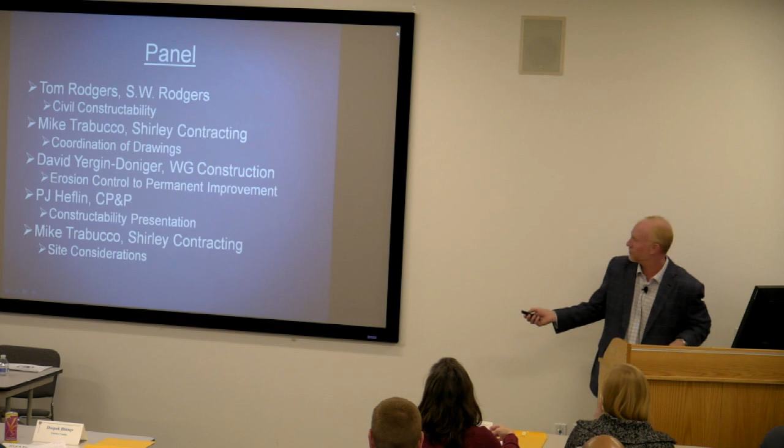So topic number one, let's see if I can navigate through this PowerPoint. To me it was pretty easy, something I see a lot, and that is the challenge of installing utilities in narrow easements.

This is more so directed towards sanitary and storm than water main, because obviously they're... whoop, how's this? Need to go back a little bit. Stay, can you get that to stay there for a second? Oh, is it timing itself? I think so.

For those following along, this is in the smaller packet on your table, the one that says SW Rodgers. Oh sorry, it's still kind of clicking through.

I know a lot of you by name, and I've spoken with some of you by phone and never met you, but I guess I can see that a lot of you have site experience, some maybe don't. Does anybody here have actual hands-on field experience working on the ground for a site development company? No? This might've just gotten a little bit easier for me then. I'm just kidding, that's fine.

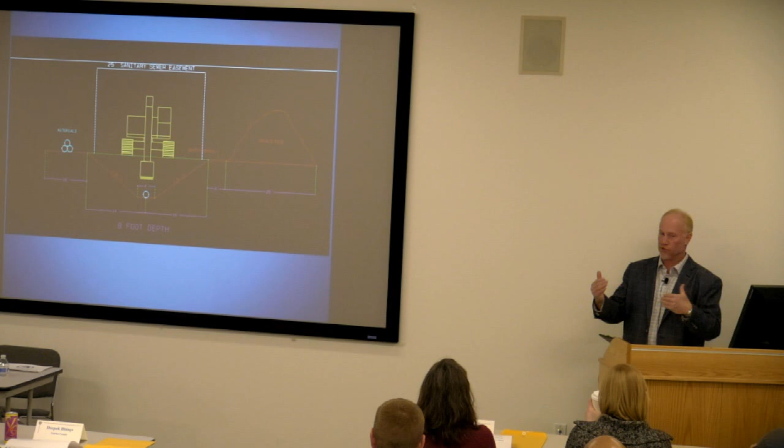Does anybody know, well you have the picture in front of you now. I wanted to give everybody an idea of how wide the footprint is of most of the excavators that we all use, about the same size commonly used in our industry, and it's a 12-foot footprint. That's regardless of whether it's a 100,000-pound machine, which is what we use to install utilities, or an 80,000-pound machine. So pretty big toys that we're playing with out here.

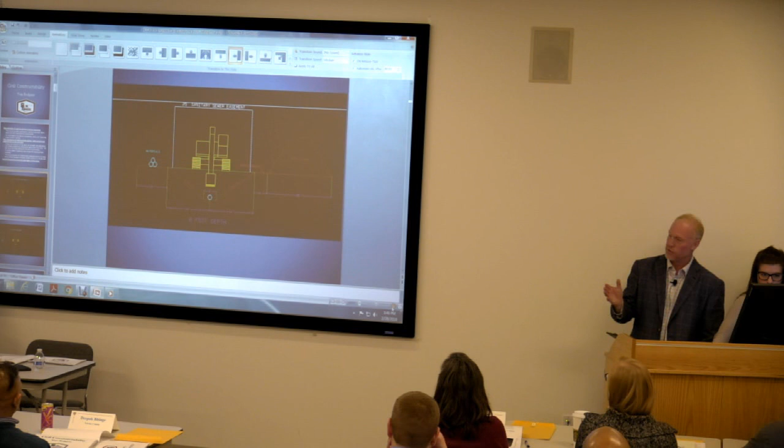How about for all the engineers, the OSHA requirements for excavation and trenching? Is everybody on terms with what they require right now? Anybody? They require a 4-foot walkway at the top of the ditch, yes, if that's what you're referring to. But OSHA regulations for trenching and shoring are actually determined by the type of soil, and predominantly what we're used to and what we have up here in Virginia are Class C soils, and that translates to a 1.5 to 1 shore slope.

So by posing these questions, I'm just trying to set the actual stage for an actual installation. You can see on the PowerPoint that I have an OSHA-approved excavation for an 8-foot deep trench.

And what I find a lot is that when I get a set of site plans, they'll be issued with a dedicated easement of say 25 foot wide. As you can see by the PowerPoint, the width of the ditch alone exceeds the 25-foot easement. That's highly problematic, because 8 foot in our line of work is really not very deep at all. Not very deep at all.

But it's OSHA mandated for a reason because it is a safety issue, and it comes down to basically a pretty easy formula. What OSHA assigns to it is 3 times the depth of your utility plus the bottom width of the ditch. So obviously, in an 8-foot deep excavation, the top of your ditch is going to be 28 foot wide.

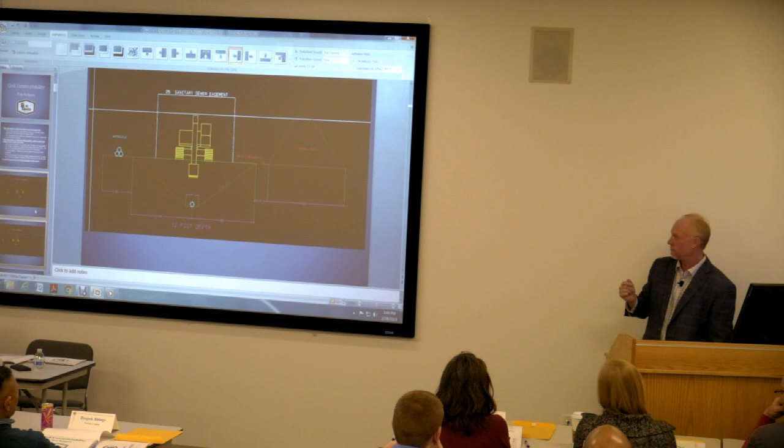The third variable is maintaining erosion controls. I need to be able to clear this easement, put my silt fence up so Mr. Glass won't issue a violation, blast it and excavate it, and keep my erosion controls up at the same time. So by the time you clear for the easement and step in a few feet to install your erosion controls, your space is limited again.

So where I'm trying to go with this is that if at all possible, check your depths, apply the formula, and grant enough room to safely install this, because one thing you cannot vary from are the slopes on these ditches, and it's a safety thing. To me, that's huge, and I'll never put my men in danger. That's for sure.

Is anybody familiar with the trench box situation? As you can see, I've applied the terminology from the trench box to the same easement, and it certainly does bring your footprint in, but by the time you have your spoils pile and material access on the other side, a 25-foot easement still just does not get you safely where you need to be. So if you can avoid it, please do.

I was actually on site just the other day, and I took a picture of a utility trench, and this is about 12 feet deep. You can see from the top of the ditch where the ladder is on the left side to the other side—it's kind of hard to put in perspective, but that's about 40 feet wide. And that's just a 12-foot deep excavation, which really isn't all that deep until you're standing there looking up at the excavator.

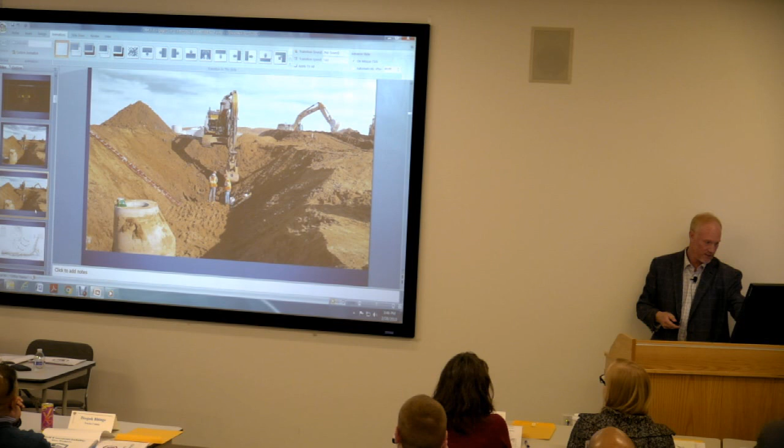It's a little bit more than that, but that's all right. It's okay. I just wanted to show the magnitude of the ditch and really what it looks like when you apply this formula to it.

In Class A soils where you have a trench situation with solid rock, you can—4 foot is the maximum. But in Virginia, because of the type of soil we have, and with most everything shot, there's no vertical whatsoever in an OSHA ditch. That used to be what everybody went by around here, but for that reason I think OSHA changed that. That's been 8 to 10 years ago now.

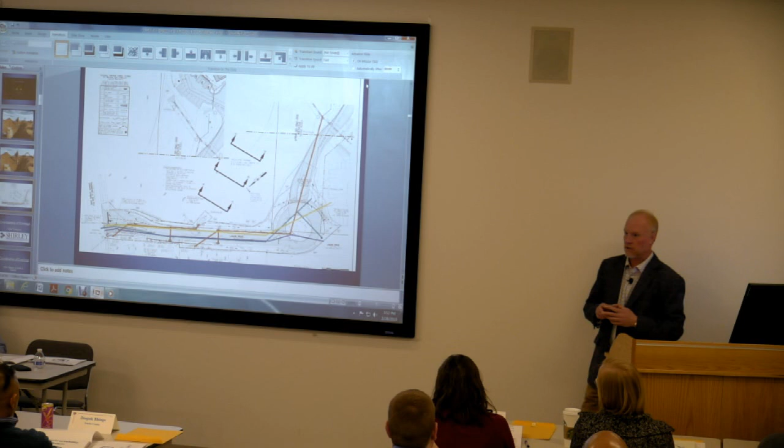Well, I think he would rely on the engineers to show this being there. He would never have known where the gas main was, even if he did know the existing building was serviced by it. You need to know exactly where it is on the plans.

So in this situation, what I did becomes a collaborative effort with the surveyors. I brought a hydro excavator out here and excavated in known locations. The surveyor came out and plotted the lines as we test-pitted them, so they could essentially build an as-built of that line, and he could plot it on the plan. We knew where we were at that point.

But even if he did know it was serviced by this gas line, unless he knows where it is on the plans, it's hard for him, or anybody, to design around it. But when they came out to mark the lines, the water meter's plain as day, right there, blue marks right to it, and from there on into the building.

This obviously got re-engineered and moved out of the way, and by the time we figured it out, my structures were already made, so it's not as simple as just moving it around. Sometimes the structures will work, sometimes they won't. In the case where it doesn't, he just bought a structure for nothing as well.

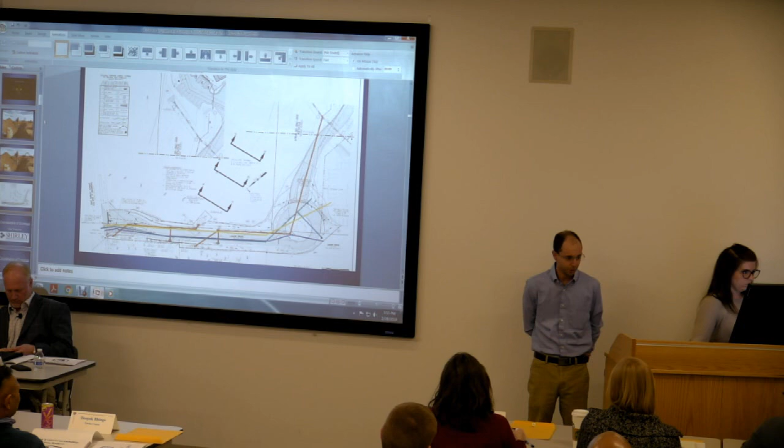Background on myself: 14 years out of college now. Went to Penn State, civil engineer by education. I grew up in the business side. My dad was a contractor, bridges, roads, infrastructure. So I grew up around it all my life.

All I ever wanted to do was design bridges and structures. I quickly found out once I got to college that I really didn't want to sit behind a CAD screen all the time, but I still wanted that fun and field experience. So I transitioned back to the more building side, but kept my focus in structures and in the engineering world.

I've been with Shirley almost 14 years now, worked there as a contract manager. So at this point, my role is really more of the bigger picture management, more than one job, keeping an eye on schedule, owner relations, designer relations, both on the design-bid-build world and the design-build world.

So we've got jobs where we'll work hand in hand with the designer to come up with the plan out the gate, and then we'll have jobs where plans are given to us, typically VDOT or Prince William, Loudoun counties, on a jurisdictional basis, and we build from those. So that's a little bit about my background.

This first section I'm going to talk about is coordination of the drawings. So we all understand you each have your discipline. You got the water resources guy, the structures guy, the bridge guy, the roadway person—everybody's got their level of expertise. The MOT person's different, the signal person's different. But at the end of the day, all those drawings got to come together and it's got to work in the field. We got to build all of this stuff.

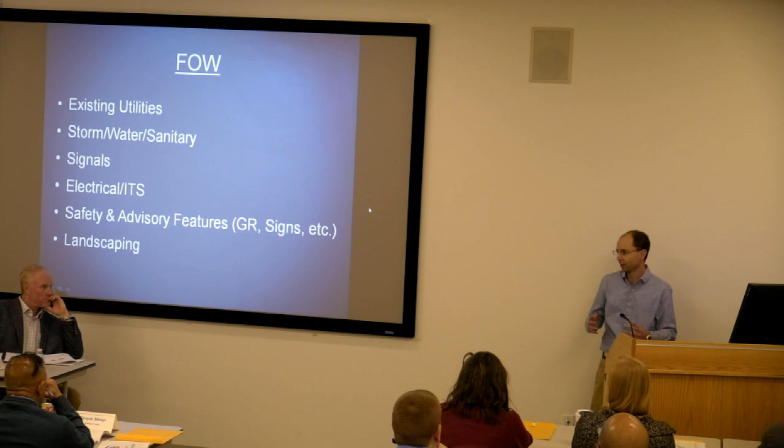So I've got just a handful of plan sheets here, and I'm going to highlight a few things—not things that were wrong, but things that as we find them in the field, maybe could have been improved on, maybe they couldn't. You guys have design constraints. The owner's given you direction on what he wants or doesn't want, where he wants things, how he expects his site to look at the end of the day. So maybe there's nothing any of us could have done differently, but if we know a little more going in, maybe we come up with a better package going out.

Just a couple things on this sheet here: you've got a new 48-inch storm running right down the road, but look how close it is to the existing 18-inch that's there. You've got a storm structure here, 48-inch there—you know this is deeper because it's outfalling. But we're going to be right up against this likely fairly shallow existing storm system with a deep trench, like Tom just showed. How does that all get pieced together?

There's no chance that the lines drawn on that page represent a 4-foot diameter pipe, which in reality is closer to 5.5 foot on the outside. You quickly end up with an 8-9 foot wide trench just to get your bedding—takes up a lot of space. And then over here, they show this itty bitty little bump out.

Back to Tom's point: how do you get a piece of equipment in there to get that end section in, get that outfall, or pick up that low spot out in the green area? You got to give us just a little bit of room to work at times.

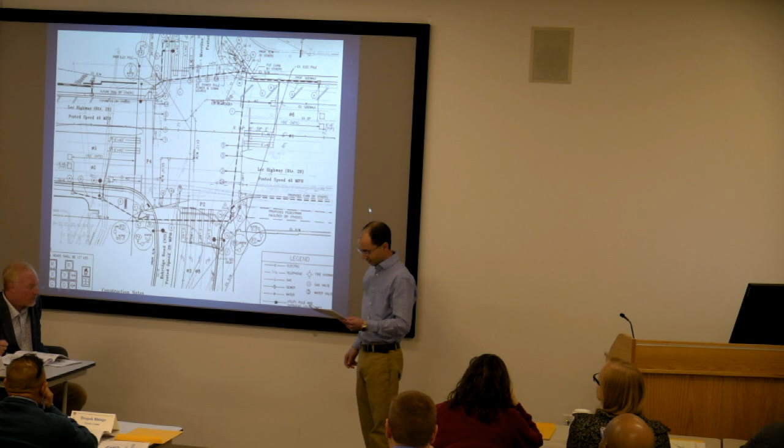So here's an intersection. All the new features are in darker black, and the existing features are in lighter gray underneath. But if you take a look, you've got junction boxes over top of existing utilities. Maybe it has to be there, but in reality it could be moved just a little bit one way or the other. It does in the field. You guys know that not everything you show on the plans ends up exactly where you thought it was going to be. Sometimes we have to move things around, and it just works.

Conduit next to a sanitary lid. There's a few of these spots throughout here. And a sanitary line there. You've got this signal pole right here. Every set of plans, doesn't matter who designs them, signal poles are just a circle in the ground. Depending on that mast arm, that circle could represent a 4-foot shaft that's 20, 25 foot deep.

It's a contractor-designed element, so it's not something you're responsible to design the foundation for. But you got to understand what that foundation is going to be, how big it's going to be, how deep it's going to be. And with some of the rock we've got in the area, you're not drilling 20, 25 foot deep to put a foundation in cost effectively. So you end up with a spread footer, maybe 10, 15 foot square, with a pedestal on top. They're still 8 foot in the ground.

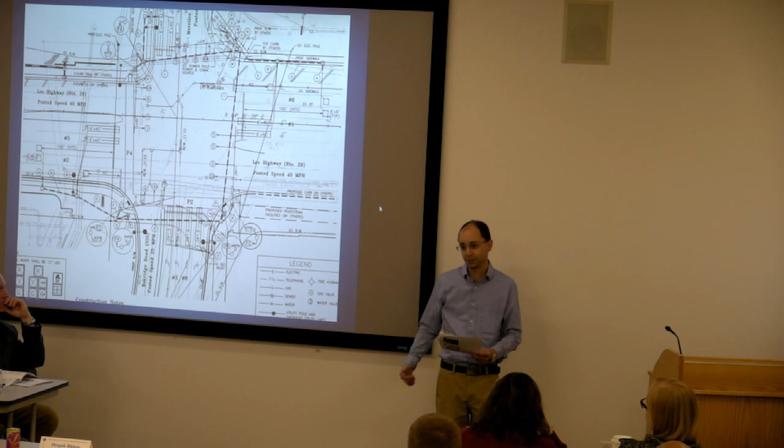But now you're hammering a big hole in the ground to get that one piece in there. And if we stick them too close or right up against sanitary structures or other facilities, water facilities, then we miss the mark, because now that owner can't service his facility at the end of the day. He can't get in there and maintain it if something goes wrong. Or he's mad when we go out there to build it and says, you're not building that on my easement. So we got to understand all those features and how they interact.

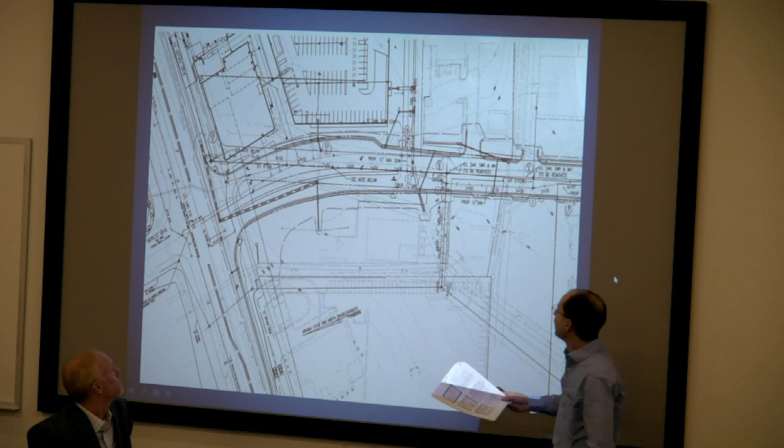So this is just another sheet, a little bit different view of the first sheet I had. Well, look how many times the storm system crosses the road. There was a lot of opportunity to optimize. If we looked at it from a more holistic approach, sure, it probably made sense. I'm sure the designer had good intentions on why he or she put this thing together the way they did. But if you step back and looked at it afterwards and ask, is there a better way? Could I upsize a couple pipes but take a bunch of footage out of the job?

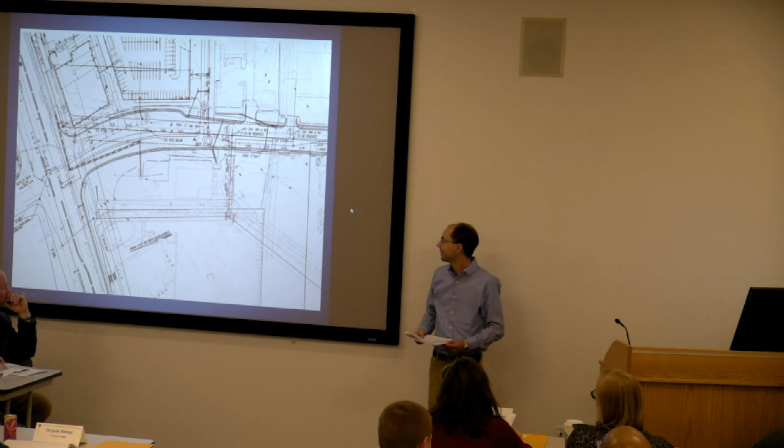Sure. At the same time, this has got an active, smaller road that runs through the whole thing, so I'm actually crossing the road to put a lot of these runs in. And then I'm crossing a number of utilities that run down that existing road to put those facilities in. The less time we cross traffic, the less times we cross utilities, the more efficient our operations get, the better the product is at the end of the day, the less cut up it becomes, the better for everybody.

And then something we deal with a lot on the Shirley side, being more of the heavy civil horizontal world, is phased construction. None of us like to sit in traffic, but we certainly don't like when they take a lane away from us for a long period of time when we go home. So that doesn't happen around here like it does in a lot of other states, a lot of other jurisdictions. So what happens? We're phasing the work so that we can keep moving people back and forth while we try to improve the situation out there.

So you got to consider how we're going to maintain that traffic, how we're going to construct it, but also the duration we're going to be out there. And then provide the necessary information so that when the contractor's bidding it, we can evaluate what's going on, how it's really going to be, what we should expect.

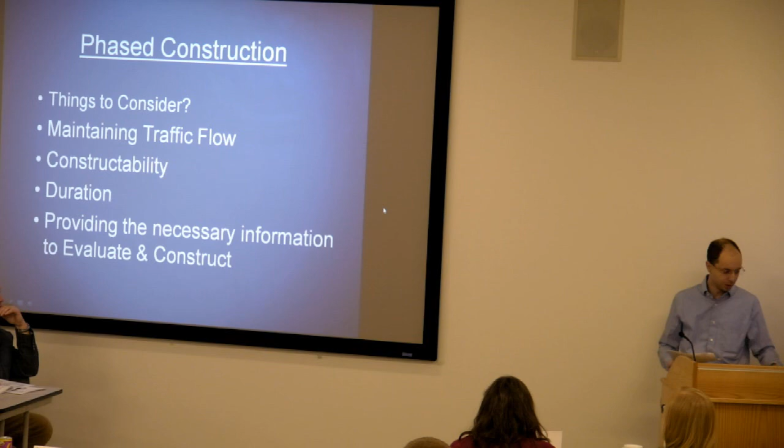So this here is an intersection out at Linton Hall and 29 - anybody familiar with the Gainesville area, the massive improvement just off the top of the sheet, there at the railroad.

The designer designed a detour to take traffic off the alignment. It improved the situation at the same time, gave some more lanes, worked pretty good. But the designer missed it, and we missed it too when we pulled it together. We built the detour exactly the way they showed us, and didn't catch it until we built this road all the way down to this intersection.

There's a 4-foot vertical delta between the new road and where the old proposed road was. It's what they needed to have, you needed the new profile, but could we have done something a little different on the front end? Sure. Maybe we could have adjusted that detour alignment, caught a little bit of buildup as we came through in that phase.

That would have saved us from doing all 4 foot of buildup in the back phase later on. As a result, we also had substandard signal height for about 2 months. So if we would have done some things at the detour phase when we set it up, adjusting that profile up or moving some things around, maybe raising those signal arms or signal heads that fed the intersection, we wouldn't have had that 4-foot vertical jump at that time.

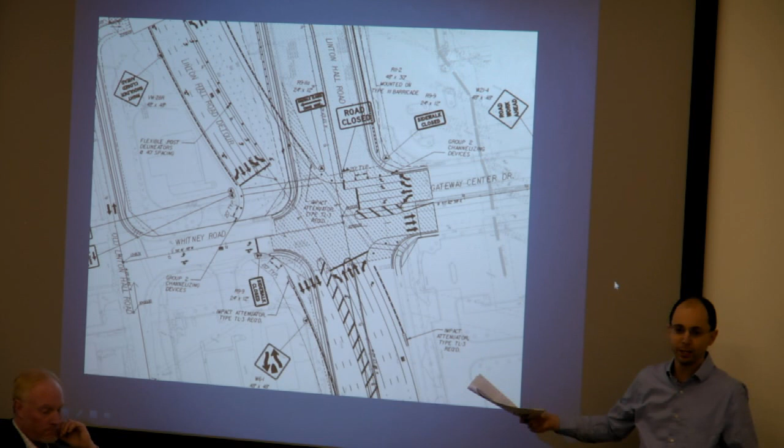It might have been 2, 3 foot, something a little bit more palatable for the owner. At the same time, it's 4 foot of asphalt. There's a lot of asphalt and a lot of expense that the owner chewed up in that intersection for no good reason, but he had to, just to maintain traffic moving.

Some of the cooperation we're expected to have at the end of the day. As a prime on most jobs, we take the lead, but our owners never exclusively give us a work area. I've had one job where I had one contract, and another general contractor was fortunate enough to get a job directly above me. He got the interchange, I had the widening underneath. We had to work together with overlapping schedules, overlapping scopes. I'd have a sliver widening going up, they'd have a sliver widening coming back.

It's unique, you don't see it too much, but if we don't have good collaboration from the design, the engineering, the owner side of things, and the contractor working together, all that blows up in everybody's face. So you guys got to understand what kind of collaboration you're going to have. Then you got the subs and the adjacent projects and other ancillary features that all play into how our sites work, how our jobs come together. Because at the end of the day, we can't impact everybody.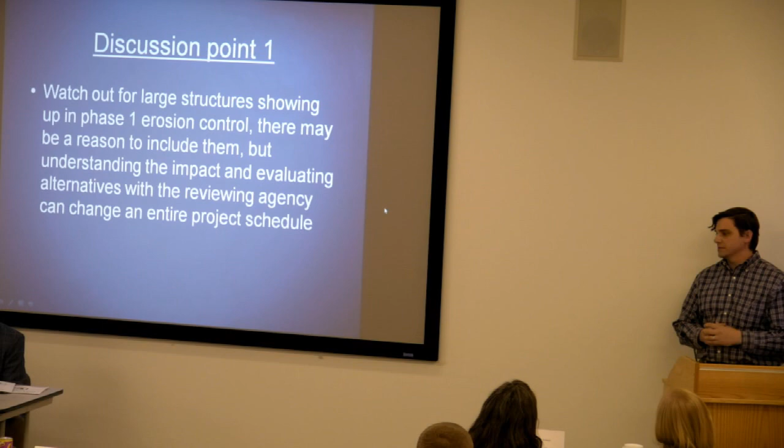Here it is showing up in phase 1 erosion control. And I'm sure if we went around the room, I could hear dozens of examples of why this shows up on this plan, and we have to deal with it.

But here's the story behind this structure. This was a residential project. Developer wants to close lots. That's what it's all about. Closing lots, getting people in the houses. That's when the payday starts for all the investors.

They try to minimize their costs, the developer, all the way right up until the last minute, right? And then all of a sudden, whoever the winning site work contractor is gets a phone call, or maybe it's a series of meetings of negotiation, whatever it is. Go.

Developer says, give me the approved set of plans, because we don't have that one yet. That's something that happens to us a lot. We have the bid set, and then things change, and then we get the approved set. Okay, so now we're ready to go. We've got the approved set of plans, roll them out on the table.

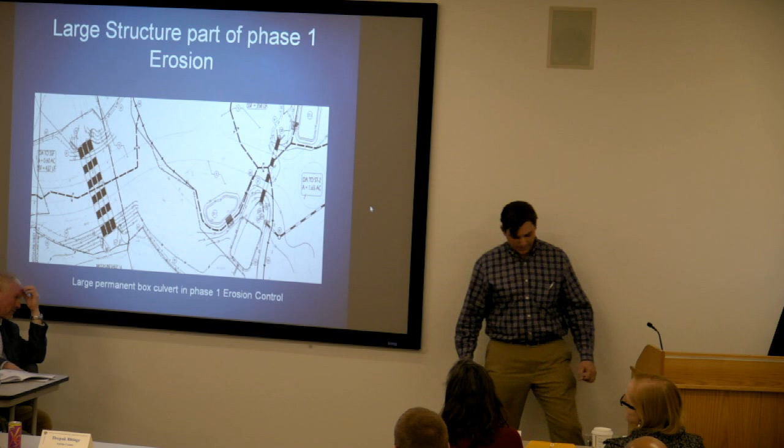And that becomes an issue in the field. Tom and Mike, I see nodding heads. If you've got anything else to add on the end of that. Well, I do, and I almost went with this topic as well, because whether it's of this magnitude, or say it's just a 60-inch class 4 RCP because it's a permanent structure.

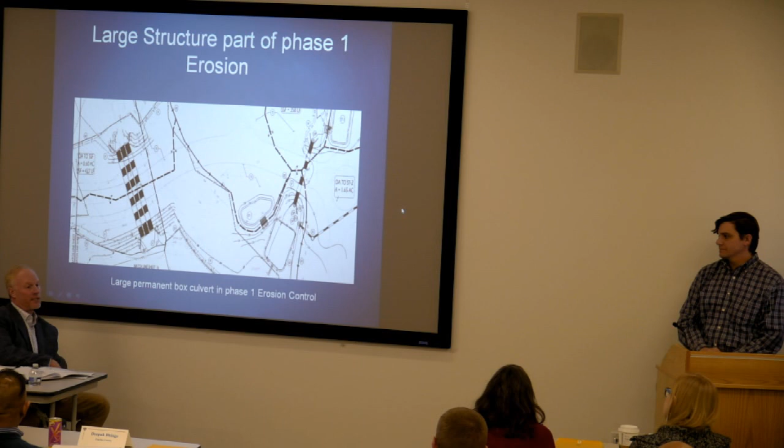What I see a lot of is, that's fine with the erosion control showing this pipe going through here, but on the final site plan, your sanitary goes underneath it. It's not very often shown in a phase 1 erosion plan, but you're never going to build any kind of permanent structure, turn around and take it back out, put your sanitary in, and then— I mean, you're not going to tunnel it.

So the deeper utilities need to go in first, and that needs to be taken into consideration when any permanent structures or pipe are included in the phase 1 erosion plan. Greg's not going to want to see too much activity, too much disturbance in phase 1, but you're not going to put it in, take it back out, put sanitary in, put it in again. So looking ahead at what utilities are involved with putting those erosion controls in is, in my opinion, huge. See it a lot.

Good question there. The one thing I would add to that too is you're designing this large structure for an ultimate condition, whether that's a 50, 100, or 200-year storm, whatever the storm is that you're designing this big structure for. Phase 1 E&S, you might be able to get away with a 2-year storm, a 5-year storm. So this big box culvert or multi-barrel system—maybe it's 1 barrel—gets me across, gets me through my site. I can now do what I need to. I don't risk damage, I don't risk silt to that permanent structure, and it gets you an option.

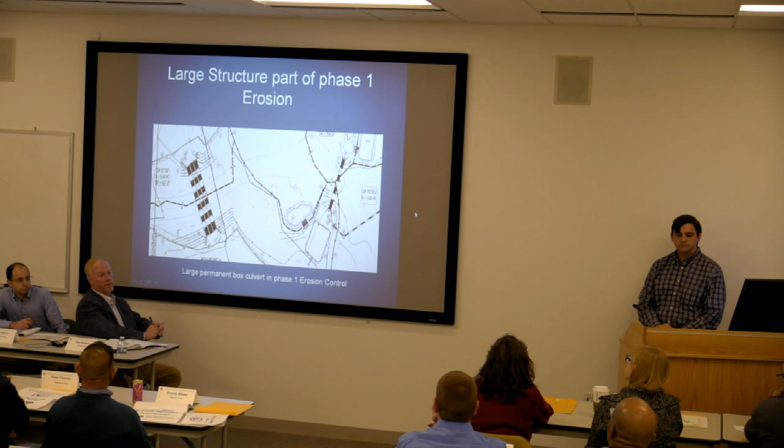2, 3, 4 36-inch corrugated metal crossings. I'd rather see the CMP in there. Yeah, you know, it really makes no difference, I can go either way. I just need to see the sanitary in if you're going to show the permanent. That's where I am with it. To me, it really makes no difference.

I'm always going to try to do what's right for the owner and what helps him out the most. Sometimes you cannot avoid it. Sometimes you're subject to wetlands impacts, in which it's a time-sensitive issue.

My thing is, I can put temporary pipe in. It's not a problem. You can beat it up, get the timber out. That kind of stuff takes a beating when you're still in the clearing process. So that's not as much an issue as just showing all the proposed utilities and how the phase 1 plan affects the ultimate plan.

Keep in mind, at the end of the day, most jobs, whether private or not, we have to TV a lot of these facilities now. That's pretty much the requirement across the board. So not only are we TVing for silt and obvious blockages, but now we're measuring cracks down to the millimeter, joints down to less than an inch. So these structures that we put in early have a much higher susceptibility to damage just from the 100,000-pound machine, the soft soils above them, maybe minimal cover. You needed a big structure, but you got 2 feet of cover over top of it to your finished pavement section. So you need to consider all of those facets and see how we can minimize things. If it's something you can put in the plans as an option, build the permanent, or here's a temporary if you got to use temporary, and then the contractor can make that decision.

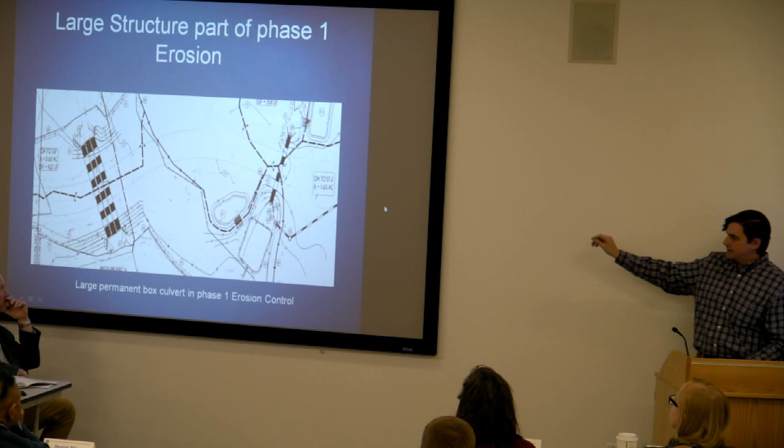I want to jump on that one comment Mike made, that's really important from a structure standpoint. I'm trying to be material agnostic on this discussion, but a structure is designed for a certain amount of dead load, a certain amount of live load. If you're scratching this culvert in and putting back basically to existing grade because you haven't done any fills on the rest of the site, but this ultimate condition is a 20 fill, for example, you're running 100,000-pound excavators, 30-ton rock trucks over the top of the structure without having the right amount of dead load to displace the live load of the ultimate configuration. You're really putting the structure at risk.

You don't have the same issues with pipe, but pipe has a bigger range. You need to have 3 feet of cover over top of the pipe during construction. It happens, a lot of cracking in concrete pipe happens from the rock trucks, dozers, without that 3-foot condition.

Good question, and definitely worthwhile. If there's a way to put it as an option and let the contractors figure it out or take risk on bid day, then that's up to the contractors. It gives the inspectors the leeway to say, oh, there's an option here, we don't have to hold up phase one.

There's also quite a bit of work, and this is the last comment on this slide - it's going on a little more than I anticipated. But there's a lot of work to get this in. There's a lot of excavation, topsoil, haul road that needs to be brought back there. And it could be pipe, same thing, tractor trailer pipe, and you've got track equipment hauling the pipe back there. The end walls would also have to be moved back there in some fashion as well. So in the spirit of phase one, where you're trying to minimize your footprint on the site, this really doesn't help with that.

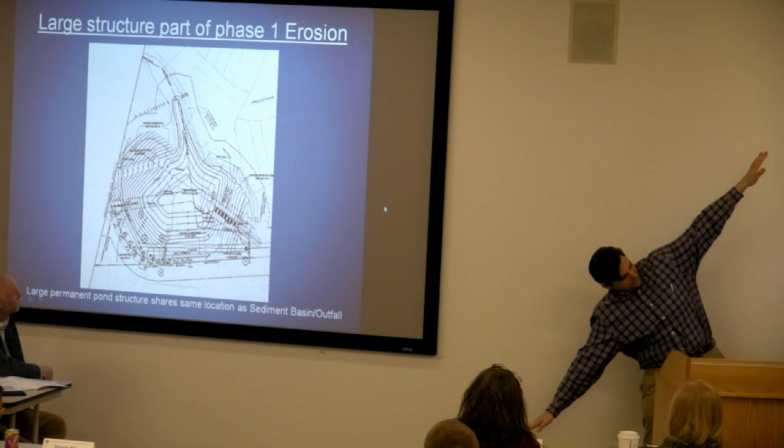So this is an interesting structure, and I don't know if there was a better way. We found a better way in the field, but it was tough. This site was like this, and you can see it in the grades.

So we're looking at this thing right here, and you can see these grades, 2-foot contours. Start counting those up to the top of dam elevation, I think you'll end up with around 20 feet. My memory is this structure was 24 because we had to put this base all the way down on existing grade, actually cut topsoil and go down a little bit deeper and build it back up.

You can count the contours going back down. At the top of the structure, the grades ended up tying into the size of the structure. So there's a pretty big capacity in the pond, and this was catching water for the entire site.

I didn't show the erosion control plan on this one. The temporary basin on this particular drawing is right here. Nearly impossible to build in the spirit of construction.

So now you've got back to the point that Darren was making, let's put the permanent one in on day one. This structure was 24 feet tall, 14-foot diameter, round. And if you look at this little piece of pipe that comes off the side here, it was shown as RCP. It ended up being ductile.

This happens also a lot on plans. For some reason, we see 12-inch RCP specified for these dewatering devices. Inside the structure, what you don't see is there's a sluice gate. So that's not sitting on a shelf in most cases.

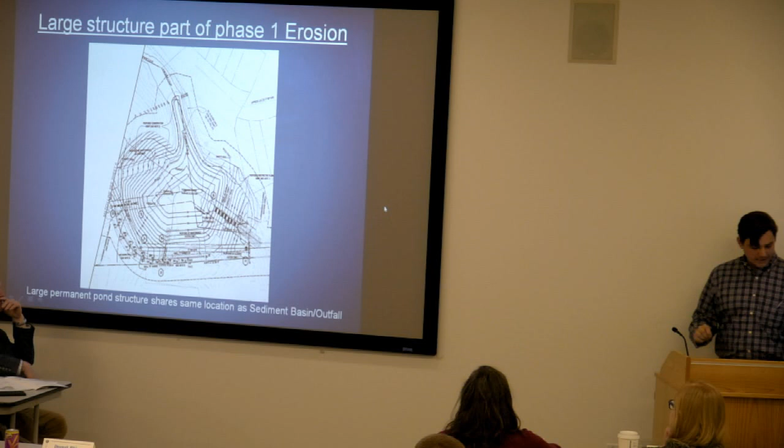Discussion point 2: watch out for the location of sediment basins and traps in phase 1 erosion control. We've been talking about that, and I think these next couple slides will go pretty quickly. Here's one where I put side by side phase 1 erosion control and the permanent structure.

Pretty benign, but if you actually get into what it would take to build this thing, this is a really tiny weir wall. It's really not that big of a deal from my perspective. But you've got your permanent pipe right here, and your temporary pipe right there. It's challenging phasing when you're going to switch.

Now in this case, we had a phase 1 erosion control plan that showed temporary pipe, but it's that transition - when can you transition from phase 1 to phase 2? This project, why was this difficult? This is going, I think, back to Darren's point - after the houses were built.

So people were living in these houses, and we're trying to get back there to put in this weir wall. Not a big deal, but there are kids playing, there are people who don't want their nice sodded yards torn up. But we couldn't, because of the way the construction was so aggressive to get those houses closed and sold, this was a big deal.

And now we've got a pond that is holding water. It's been holding water throughout construction that needs to be dealt with in order just to get that little tiny baby weir wall in there. This would be a great circumstance where the phase 1 gives you that option, or there's maybe a phase 1A where you could transition from temporary to permanent.

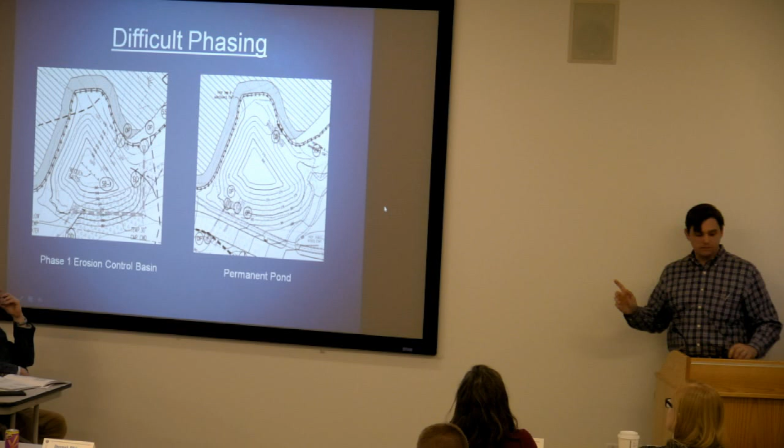Any questions on that? What do I have here? This one's challenging phasing. So this was a monstrous retaining wall - there's no better way to do it, to be honest with you. There's no better way to do it. But just look at it.

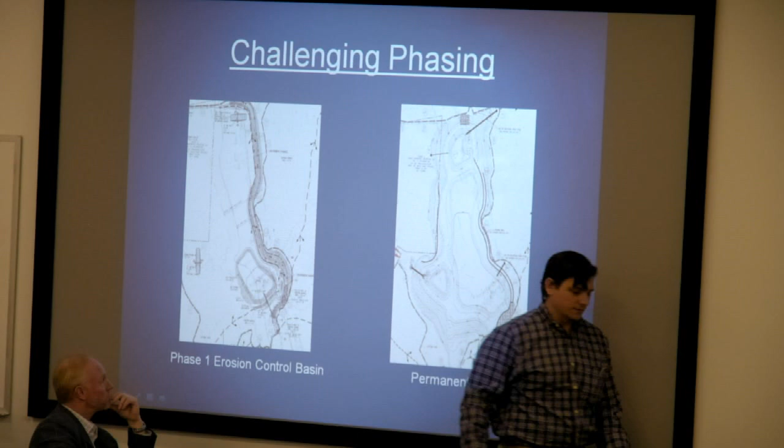Here's your pipe, here's your basin. You look over my left shoulder, this is the permanent pond over here. We're outfalling through the weir wall of the permanent structure. There's no better way to do it. There's a tremendous grade change. These ponds - I don't remember how many acres this was, 3 or 4 acre pond - hold a massive amount of water. Just tough. That's the only reason I put it on there.

It's a challenge. I couldn't tell you, and I couldn't proclaim to give you a better way to do it. But the whole time that you're building that weir wall, you're coffer dammed off, trying to hold back the water, pumping water, trying to get the riprap in, ultimately closing up the hole. Difficult. But I couldn't tell you a better way to do it.

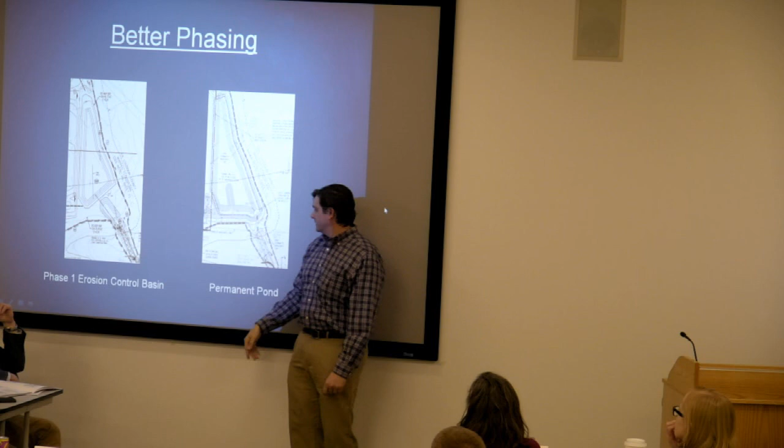Better phasing - so this one's better because it could be done. And here, really quickly, temporary pipe on the right side, coming out here, tying into the ultimate spillway, and then tucked in the corner over here is a structure. Fantastic. When this pond was built, ultimately what we ended up doing - it wasn't my company, but the company we were working for - built the coffer dam here and just isolated that area.

So we could come in after this was done, when the timing was right, build this structure, run this little piece of pipe, and when you could transition from phase 1 to phase 2, yank the coffer dam, desilt the pond, put in that little grading piece, and everybody's happy. So that's ideal, but you don't always have this kind of real estate to deal with, I get that. But this is a much better in-the-field transition.

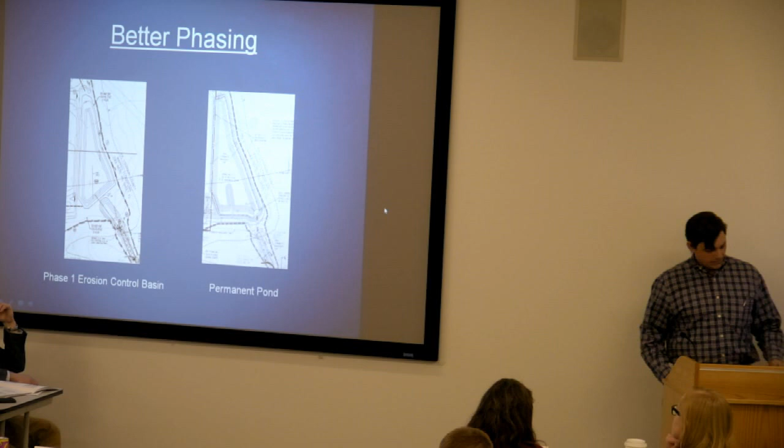Any questions on those 2 items? All right, so this is just a quick summary, really restating the other 2 slides. So if you're reading it and you have deja vu, it's because it's exactly the same words that were on the other 2 slides. And that's the end of my piece.

So I'm honored to be able to participate in this panel. And if you guys have any questions about anything we discussed, happy to address those now.

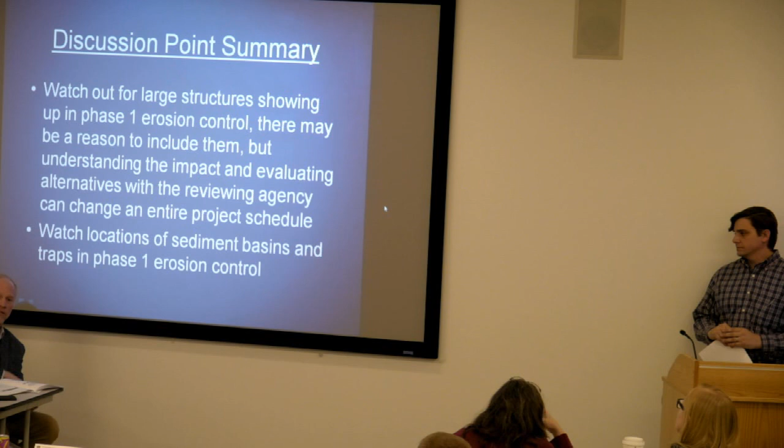It's very rare that I'll install a sediment basin exactly to plan. We're always conscientious about meeting the capacity, but if it shows it's definitely going to be a temporary pipe and structure outfall, I always relocate it or move it far enough away that I can ultimately - whether it's a cast-in-place structure or precast - still have the temporary pipe functioning, far enough away where I can safely put it in, because you need it to function as well, and you need to be able to structurally put the permanent stuff in. If not, I'll have a discussion with the inspector. As long as I meet capacity and the grades are functioning, we vary from it a lot to make that transition easier. Happens a lot.

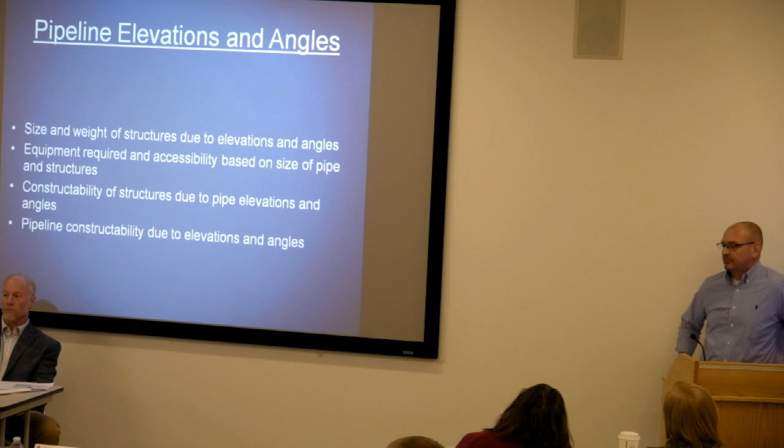Will there be some savings in mobilization of HDPE versus concrete? I don't think pricing considers mobilization of materials to the site much. It's easier to handle - the price per foot is included in my price per foot that I buy it for, and it's definitely easier to get 500 feet of plastic pipe delivered than concrete.

But all things considered, going along with the slide I showed earlier - if you were able to dig a perfectly 6-foot tall vertical ditch for 36-inch pipe, a foot of stone on either side, a foot above it, you could probably salvage a lot of stone. But the way we have to lay it back, you use so much more stone, and I have to price it that way. So the stone material price per linear foot is considerably higher for HDPE than for concrete.

The compaction has to take place on both sides simultaneously. It's approved for both aggregate, 21A type or 57s - 57s being clean stone is more expensive but self-compacting. If you go the cheaper route for bedding material, it's way more labor intensive per foot because you're compacting in lifts with two jumping jacks on either side - slow and tedious work. For DOT type jobs, VDOT's not allowing clean stone, the 57s, around HDPE pipe - it has to be 21A, 25, 26s, dense compacted stone.

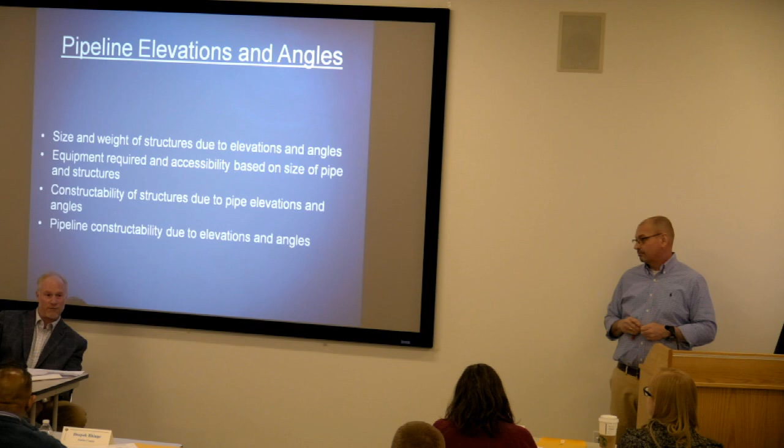But I guess my contention is, I'll say 75% of the storm pipe that I install is shot—meaning it's rock, and it's not conducive to anything but manufactured stone for bedding. So we don't have that luxury up here, because there's so much blasting. That's why the manufactured stone cost for backfill is introduced into the equation here. Whereas if you're in, say, the tidewater area, or Eastern Shore, Maryland, where there's sand...

But anyway, thanks, I just added that in. Didn't have a slide, but you get the picture.

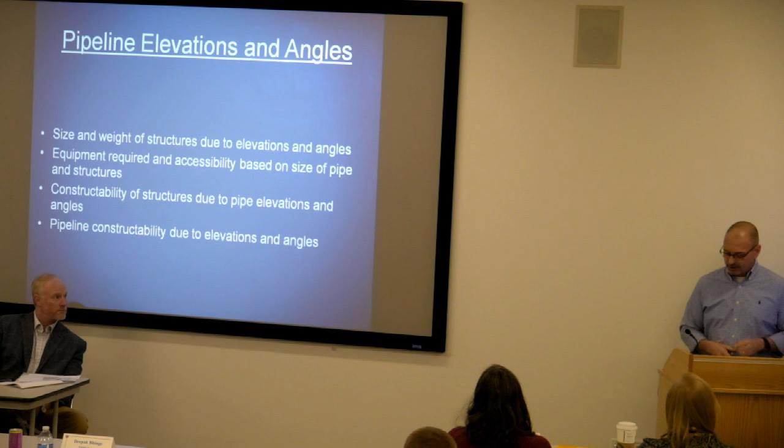You ever wonder, hey, can I fit these two pipes in a smaller structure, or if I spread these pipes more than 60 degrees, will it go in a certain size structure? I've got all of our angle charts on a flash drive, and I'll give it to Becky so she can publish it to you guys. It covers diameters of structures - 48, 60, 72, 84, 96, and 120 inch - and tells you the most acute angle for two pipes. So you just follow the chart. For example, I've got a 54 and a 48 at 75 degrees, but the one on the plan is 85, so I can put that in a 120. She'll publish that to you guys.

I gave you a handout on this slide because the slide stunk.

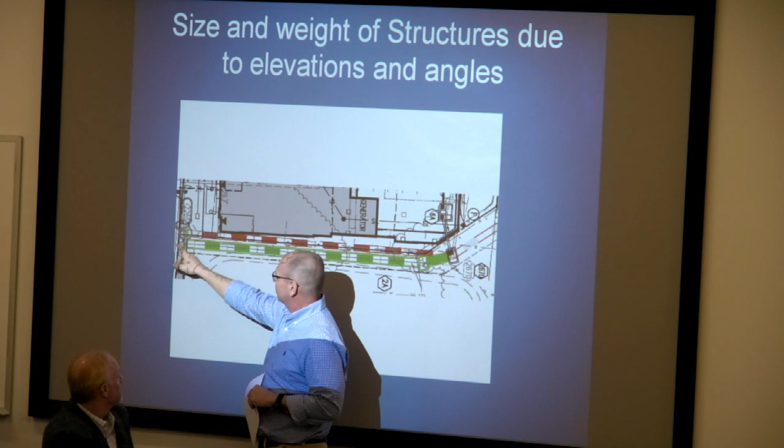This is Founders Row, a job we're doing right now. They're taking a 42-inch pipe out of the ground and running a 4x4 box culvert over to a junction box. There's an existing structure that takes that 42-inch pipe, which gets pulled out, and the engineer said we're going to build a junction box on the end.

We're going to build a junction box to take the 4x4 box and come over to catch this 15-inch pipe. The box ended up being a big junction box, probably about $12,000 to $13,000 precast. Now, I don't like to usually walk away from that kind of cost, but I suggested making a 6x6 junction box and putting a 48-inch manhole here, stubbing a piece of 15-inch pipe down. It ended up being about $6,000 instead of $12,000 or $13,000.

So you end up with one more structure, but a lot of times you can change a pretty drastically acute angle with a 48-inch manhole, and I suggest doing it because when you get up to the 60s, 72s, and 84s, there's a lot of concrete - it's costly, and it would save the owner money. The engineer took my idea and ran with it, and everybody was happy.

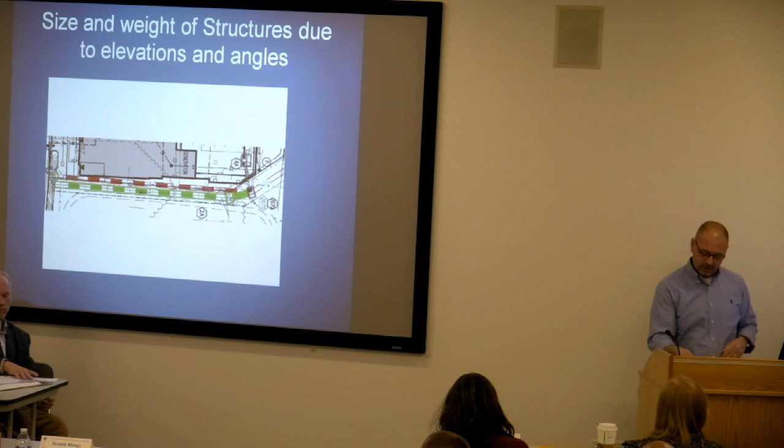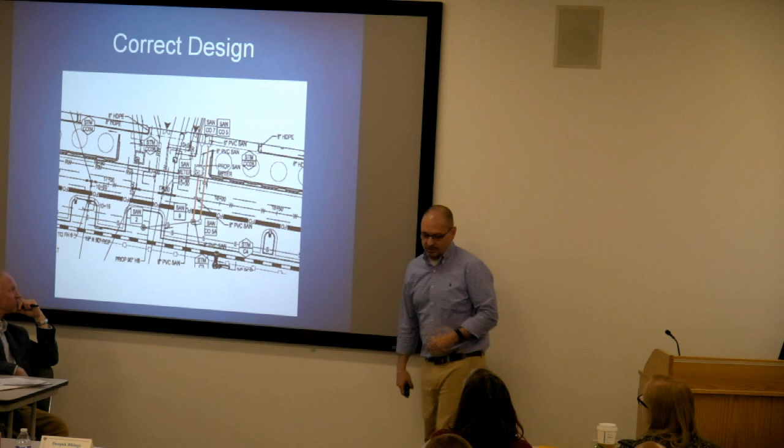So we talked to the engineer. The minimum you could put two 8-inch sewer lines in a 48-inch manhole is 40 degrees of deflection. So they redesigned it, put a clean out, and brought the blow-down vault straight into the manhole. Everybody was happy, but it took a while and brought things to a halt.

Anytime you can avoid an acute angle like that by adding another structure, do it, because when we get acute angles, we have to go way up in diameter. Just keep that in mind. The angle chart that Becky will send you guys will show you how acute you can go in certain diameters.

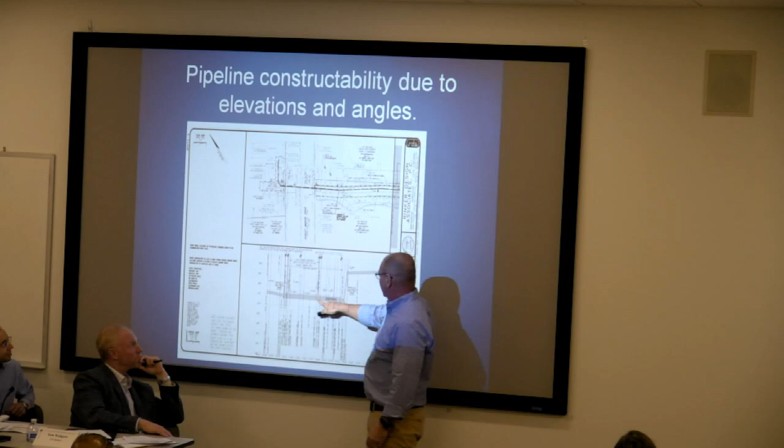This is a water line - I don't know what this utility is exactly. It's supposed to be changing elevation, maybe a 7 foot station. I think he had 7 feet horizontally to go up like 12 or 13 feet, and they show it with 45s, but it just can't be built this way.

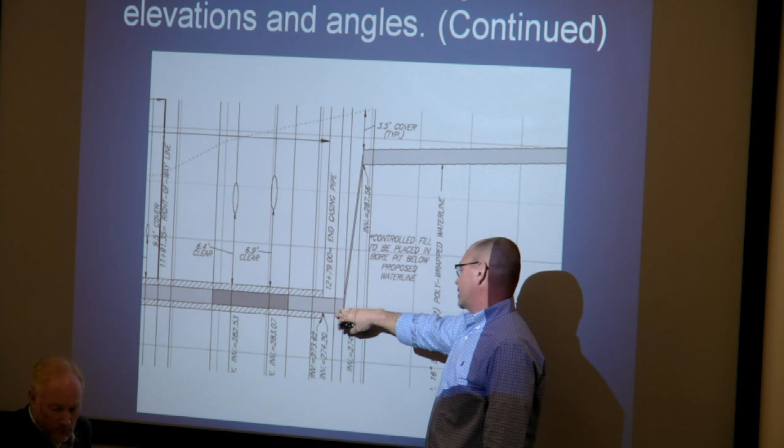I think Mark and Daryl, with Utilities Unlimited, told me they had to come up 45 and 11 and a quarter, and come up 45 and 11, or come down 45 and 11 and a quarter, to get this water line built the way they wanted. The main thing they wanted to portray is it's not like how you draw it on the plans, and a lot of time it's about how you can get it done.

We've been talking about that all day - what one estimator sees, another one doesn't.

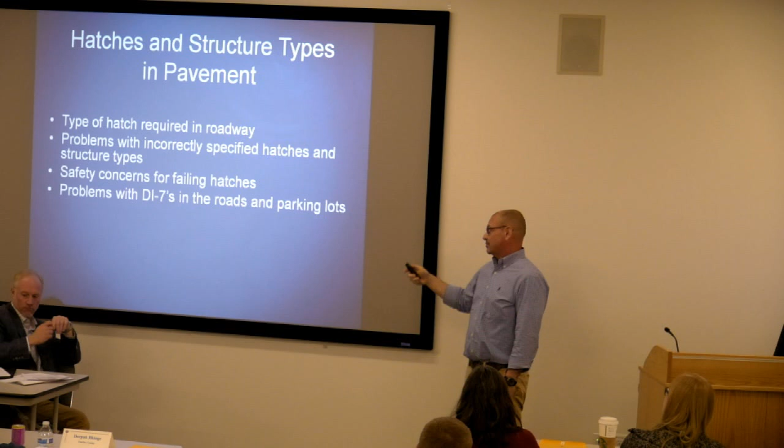Wanted to talk about hatches. We're seeing detention systems, we see StormTechs on almost every plan I see - detention systems, concrete detention systems, corrugated metal detention systems - and they all have to have access. I think this is super important because it's a safety concern, but it also becomes a problem 5-10 years down the road.

So I gave you guys a handout on this. This is a detention system in the roadway at Chantilly Nursing Home that you guys did. If you look in the handout - let me go back - well, in the handout, I don't have it up here, but I've circled the 3 Bilco hatches called out for on the detention system.

The smaller accesses are 30-inch cast iron frame and cover. These hatches, there's one there, and one down here, and they're all in the main drag here at the nursing home. So we're talking about fire trucks, ambulances.

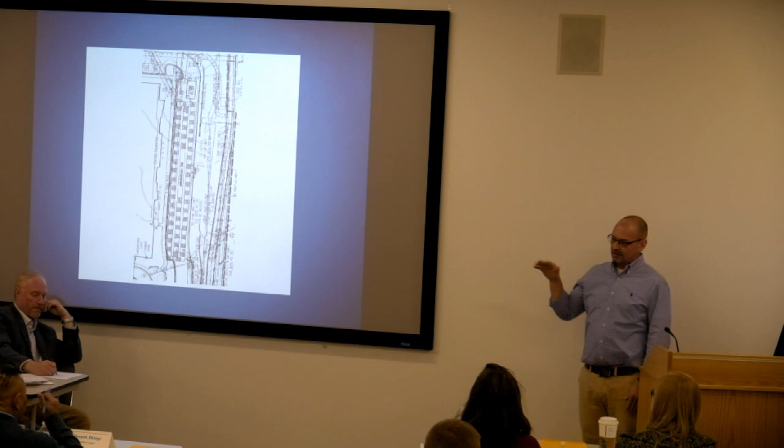I don't know how long we had it built - could have been like not even a year - and every hatch failed. It wasn't that the door failed, it was the hinges and mechanisms to raise and lift the hatch doors. They were all sticking straight up, the locks broke, and boom - one of them was in a parking space.

My main point is when a plow hits a round frame and cover, the plow gives. The frame and cover's cast iron, they're unforgiving. You can specify aluminum hatches for these detention systems, but we don't even put them in anymore. We don't put Bilco - not bad mouthing Bilco, there's a place for it - but we'll put in steel hatches from U.S. Foundry or East Jordan. There's much more substantial hatches you can put on these detention systems.

Don't let - I guess the aluminum is Halliday, Bilco, Syracuse - but U.S. Foundry, East Jordan, there's plenty of people that make cast iron or steel hatches that are going to be unforgiving to plows. I was just out at this job - I don't know if it's a Bilco or Halliday, whatever, but this got hit by a plow the other day. It wasn't that the hatch had buckled, it had been hit, it had been run over. It's near a dumpster pad behind a CVS in Warrenton.

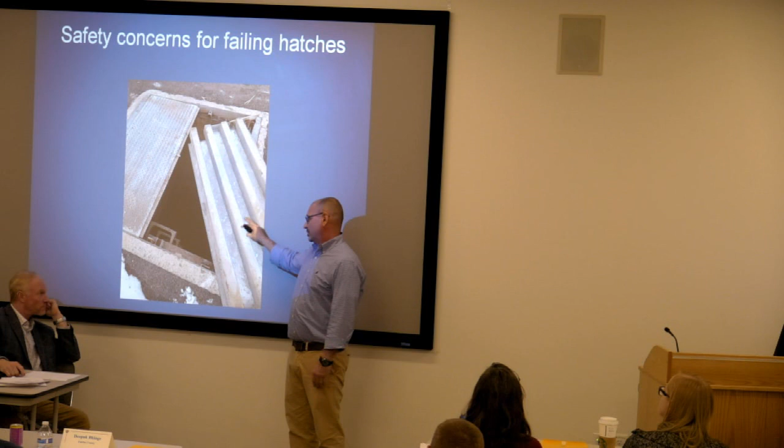Yeah, your whole crew day at least. But if they just spent - so aluminum hatch price might be $2,000 and a steel hatch might be $4,000. So you got to spend it up front to get the longevity of it. When a plow hits a steel hatch, it's not going anywhere. When a dump truck runs over a steel hatch, it's not going to buckle. What fails is the hinges and the locks, it's not the aluminum door.

So that's a huge deal right now, huge. Bilco will tell you they're traffic rated, but maybe in the corner of a parking lot is fine - that's still a wheel's going to sit on it. To me, if it's in the grass, if it's in the easement, great, aluminum all day long. But if it's in the street, if it's taking any kind of load on traffic, we really need to think about steel.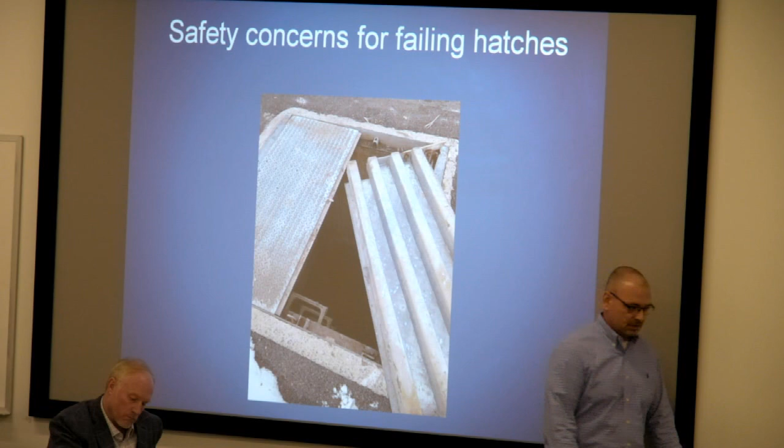But we see it in the detention systems all over, and it's super important that we think about safety and long-term viability of the structure.

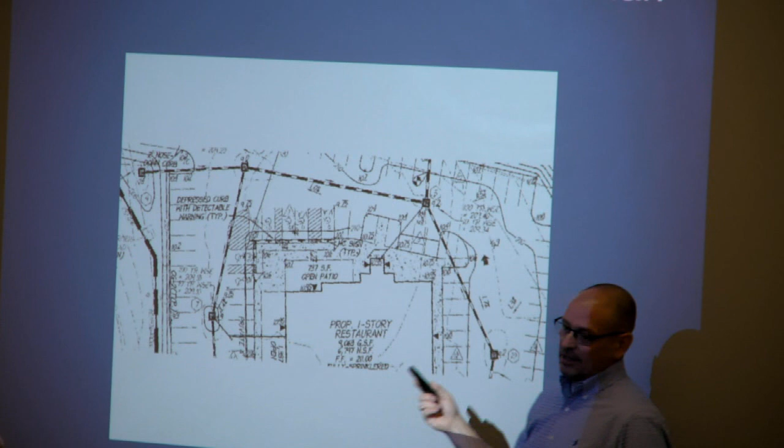Okay, here's DI-7s. Everybody's familiar with the DI-7, in a paved area. Now, this is right in the traffic way. There's 3 of them, one in the easement. I would suggest we will not put these in a paved area, and we haven't for like 10 years. Because the DI-7, it's not the grate that's going to fail, it's the concrete that's going to fail.

It's a square structure sitting on a round 48-inch diameter manhole, and the cars will point load the top. If it moves a centimeter, it starts rocking, and the concrete starts to crack. And the next thing you know, you gotta replace it. And what do they want to put back on there? A DI7. The owner says just put back what they had on there. I'm like, come on.

But we have a grate that's 38 by 38, by Capital Foundry, and it takes the same hydraulics as a DI7. Because a DI1 is smaller, a DI1 is 2.5 by 2.5, and a DI7 is like 3 by 3. So my suggestion is a Capital Foundry CB3838, and I will send the cut sheet on that to you guys also.

That's what you're calling it, CB38? Yeah, and it's private, so most times you guys go right with it. You don't have any problems with the DI1s, do you? No, if hydraulically, a DI1 is much better, if you can get the same flow. In most cases, you probably can.

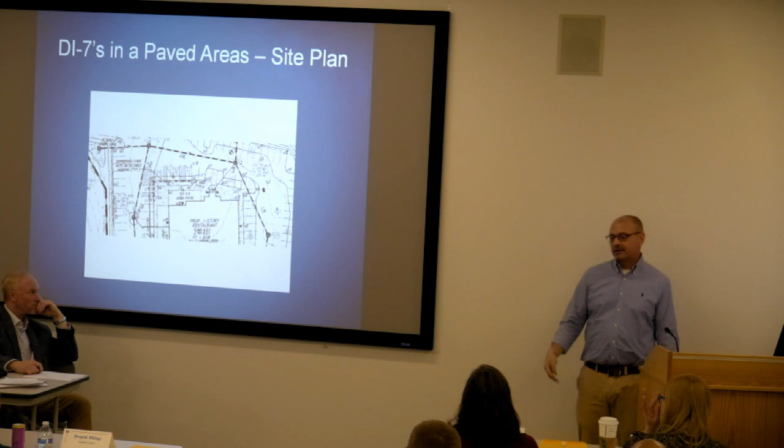And if you're concerned about a DI1 in a parking lot, we can set the DI1 grate up about 2 inches, so the pavement will come right to it rather than exposing the concrete. So a DI1, but I will send the cut sheet on the CB38. The CB38 sits on a round 48-inch flat top. It doesn't rock, it doesn't move. I'll get that to Becky for you guys. But in a private condition, perfect.

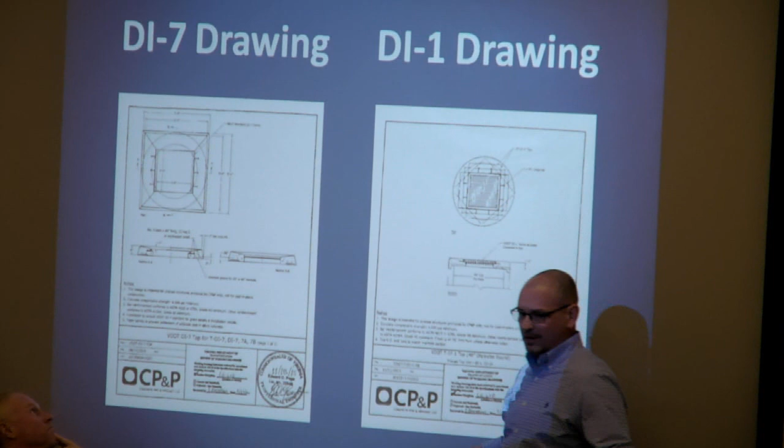Yeah, here's the DI1 versus the DI7, our drawing. So you can see this part overhangs, and there's nothing underneath of it, unless you poured a collar around that. The thing about it is there's a cut sheet in the road and bridge for a DI7 load bearing, and it's meant for a median in between highways. It's not meant for parking lots, even though it says load bearing.

Daryl and Mark wanted to talk about plan revisions. I've been in this business a very long time, and it's amazing how it's changed in the last 10 years with electronic Dropbox, with plans on the cloud. And we find ourselves building structures, we've got them built, sitting in the yard, and a new set of plans is just sent. Hit Dropbox, here comes a set of plans, and the thing's changed, and we're sitting on $10,000 worth of concrete that we have to crush,

which the owner has to pay for. And the reason our business has changed is because it used to be expensive to print a set of plans, and there weren't that many changes. The construction set was what you were going to build.

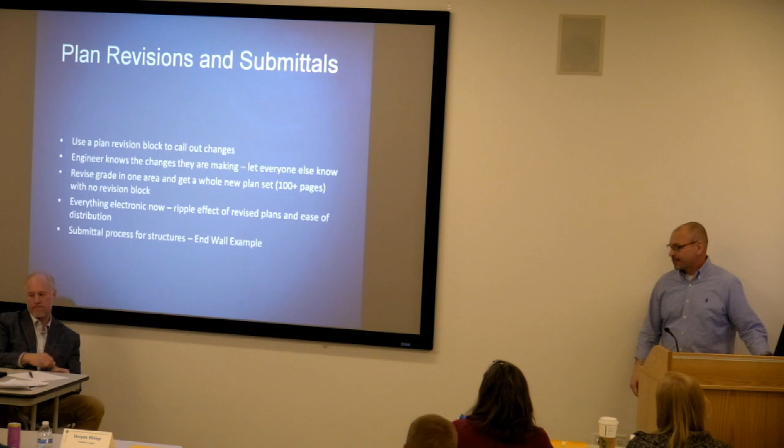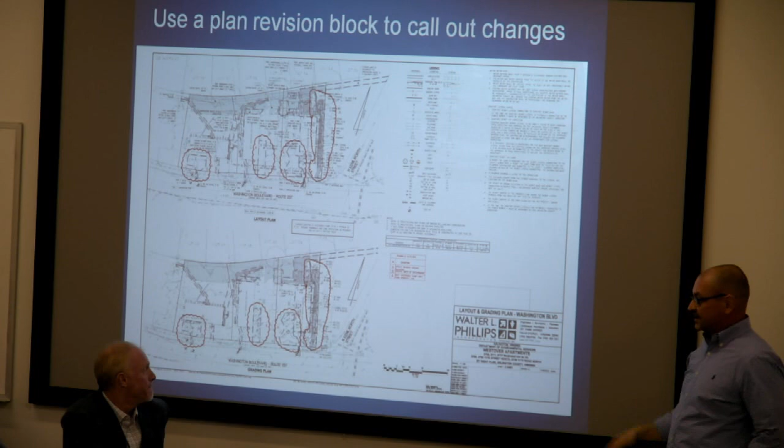But I would say if you can give us a hint as to what's changed, because a lot of times we're looking at a 200 structure job and we get just a plan, and here it is, and we're like, what's changed? And you got to go through the whole thing. If you could give us a hint, give us a cloud. I don't know if that's standard operating procedure. We're just not, it's not trickling down.

But if we take a phone call from the precaster and he asks, hey, can you give me a hint for what's changed, or maybe an RFI from the contractor, it would save us. We find that our business has changed so much that we are, go ahead. No, go ahead and finish.

Our business has changed so much that we are having trouble hiring enough techs to look at all the plans and how many times the plans are changing compared to 10 years ago. And it's because it's just in time. The plans are so easy to get to us.

One of the issues we run into is you might be getting an early version of the plans prior to the official bid set, or after, or way before the approval set. Normally most engineers mark revisions after plan approval. If not, sometimes you see first submission comments in black, second submission comments at plan approval, and then you start marking them in red after plan approval.

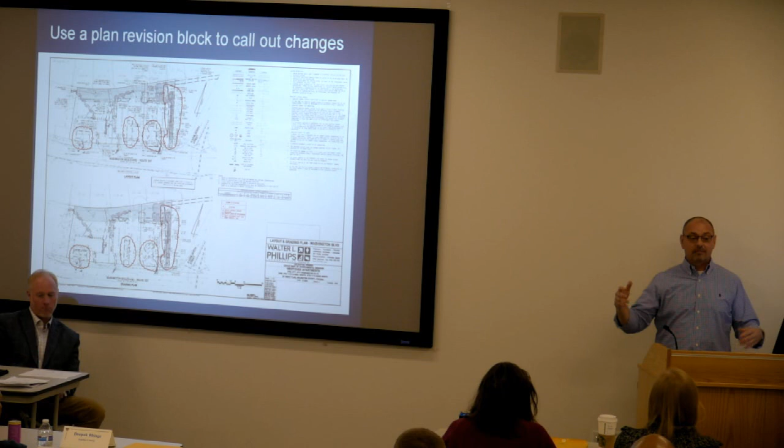When we're building it, quite often we're building it way before that. We get a lot of times like, hey, here's a plan, all your stuff's sitting on the job site, can you figure out the pieces and parts to make it work? And then there's an engineering tech doing that, and we're like, all right, you got to take off a cone and put a flat top, and it's like a big puzzle. We do it, but then there's always pieces that are wasted, custom pieces.

So I know owners like to get started. I know that when we're looking at plans initially and they don't have any stamp or the owner's trying to figure out funding, I get that. But when we build it without an approved set, that gets quite crazy.

Here's an example of something we screwed up. We built this custom end wall for Virginia Construction Company down in Spotsylvania County. It's right off Route 1 and 95. This is corrugated metal coming in at a skew. We built the holes for concrete pipe.

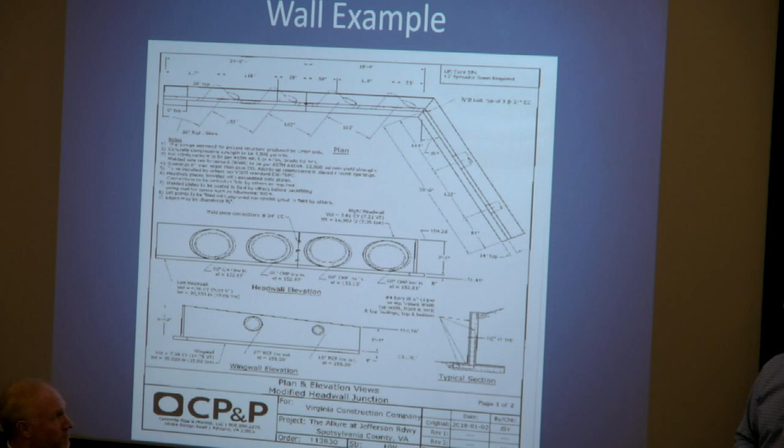We got approved submittal, but at the end of the day, even though they approved it, we don't have a leg to stand on. We're the expert. We should have built the holes for corrugated metal, which are smaller. Concrete pipe, the wall thickness on a 60-inch is 6-inch wall, so 72-inch OD. Well, corrugated metal, 60-inch corrugated metal, I don't know what the OD is on 60-inch corrugated metal, but it's much smaller. So the space they had to brick up and fill in was substantial.

Luckily, VDOT let them do it. All that being said is, we're the expert. When we make a mistake, we stand behind it. We build what's right.

So when it comes to submittals, we like to give you guys, when they're non-standard, something like this. We still make mistakes, but on standard structures, you don't need a submittal. You can just have a regular boilerplate cut sheet we can send to you, because we're gonna do it right. We're VDOT QA QC certified, self-certified. So we're the expert, and you can call me anytime to help you out with any of the nuances on your project that you think might have a design issue or struggle.

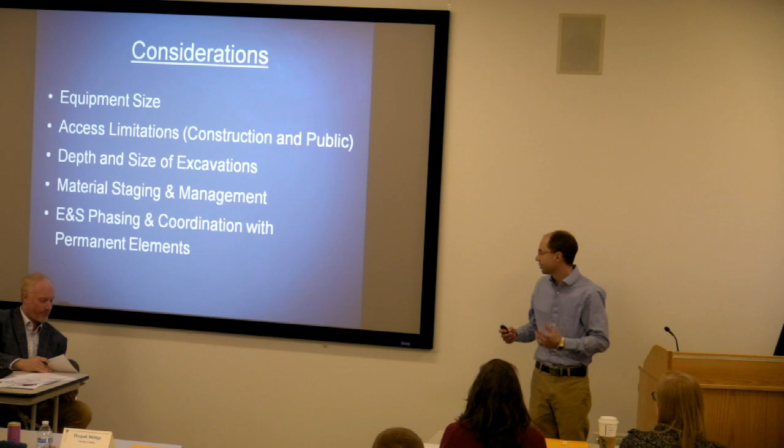Phasing and coordination with permanent elements - that's a lot of what you've seen here up to this point, but a few more slides you're going to see here in a second.

Put them in the road. How am I doing that? Under a flagging operation. So I'm supposed to put traffic back on top of that pit every night, open it back up every morning, work for maybe 2 or 3 hours if you're lucky, and close back up at the end of the night. It's not going to happen. It doesn't work that way. It would be unbelievably expensive to try to cover this hole with a roadworthy cover and build it, if it was even doable.

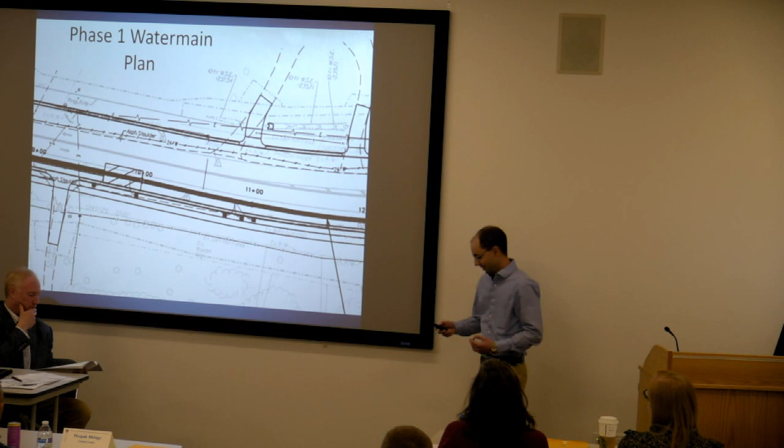So this highlights some of the issues I talked about - maintaining traffic, that phase 1 MOT only allowing flagging, steel plates not being permitted during that construction season, the window you had to build it, and at the end of the day, making it traffic worthy, with limited working hours.

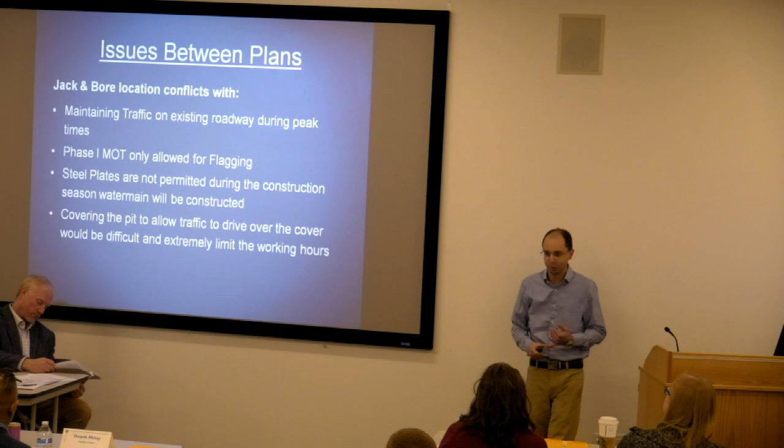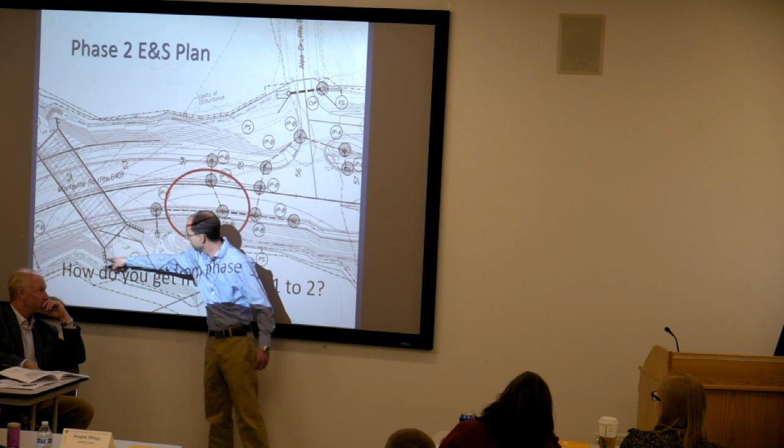So on top of all that, there's this arch conspan right here. Got to get access down to that conspan. Just off the sheet is those existing culverts that you had to maintain that stream flow around the arch in phase 1. And you limited the site constraints and the design so that I don't have enough room around this wing wall to get a temporary ditch of any kind for the stream.

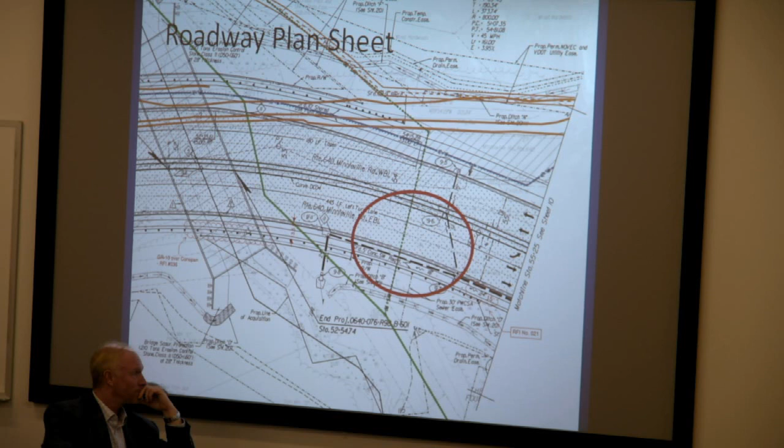So the relocated sewer goes through the temporary sediment trap. It has to go in first before the arch can get built to move the stream around it. All these layers have to be coordinated, and it's all different jurisdictions, different disciplines, different engineers all working on one big plan at the end of the day. But everybody's got to come to the room and remember to look at each other's stuff and make sure it works together.

It's not pointing fingers that, you know, you should have done this, you should have done that, we should have caught it. Nobody caught it. We figured it out when we got out in the field and we went, uh-oh, can't go there.

So the silt trap, all it had to do was just a little corner of temporary property right here would have solved that problem. And on top of that, we ended up flipping the box phasing to make the job buildable, so that those existing culverts became the temporary culverts. We worked the upstream and then the downstream instead of vice versa, so we didn't restrict ourselves in that corner, and we were able to get around it. So just a lot of constraints on the job that you've got to be familiar with.

So this compares some of the issues and some of the other things that it created. The sediment trap, you're intending to hold water in it, you want to catch the silt. But that sediment trap sat underneath the roadway location at the end of the day. So we dumped a bunch of crappy soil, silt, in a hole, held it with water, let it soak into the ground, turned everything else around it to junk. So now we created an undercut to build the road on top of it. We rippled ourselves into more problems because of the location we chose for that sediment trap.

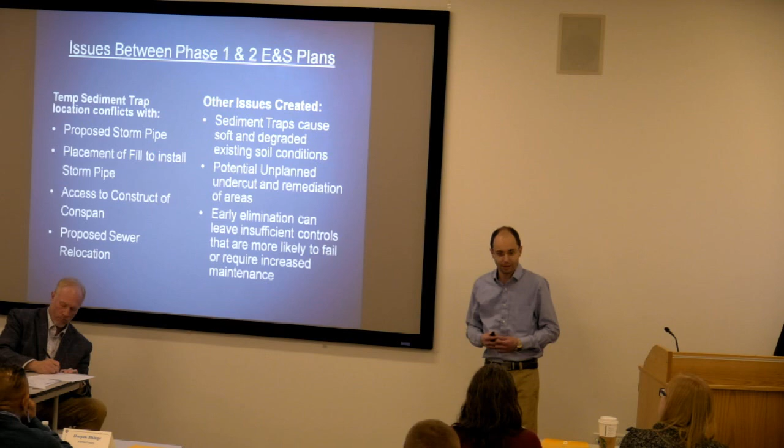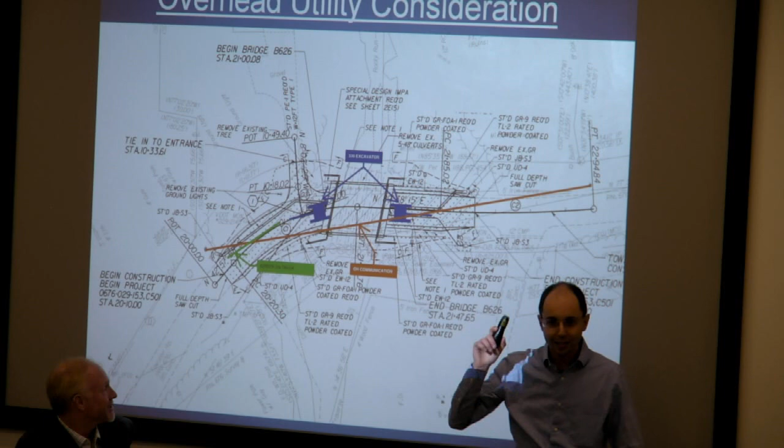We got an overhead utility from that pole to that pole with nothing in between, and a big sag. Those graphics there in blue represent a 330 to scale. They've got all the pipe. We have to drive sheet pile for the abutment to protect the scour. How do you drive sheet pile underneath a utility?

Not with a crane, sure don't. So driving sheet pile now with a hoe—little different specialty type work. Most sheet pile guys don't own a hoe.

And then you go down, how am I setting those girders? These ended up being precast concrete, inverted T girders. Put them underneath a utility, I got less than 20 feet of clearance. And then I'm stuck with rigging that's yay tall. And a concrete element—if it was steel girders, no problem. You pick them from the center, they carry the load, sling them on out there, no big deal, fairly light.

Concrete doesn't do so well in tension. Tends to break. You end up picking it from the ends—you got to pick it the same way it's going to be supported at the end of the day. But that makes your rigging real tall. At most you're limited to 60 degrees coming out of most rigging on a concrete precast element, otherwise it puts too much stress on the element itself. So to make this whole thing work, we had to add a lifting beam, press all our rigging way down so we could get the crane in there, and we flat stick the girder out on over there.

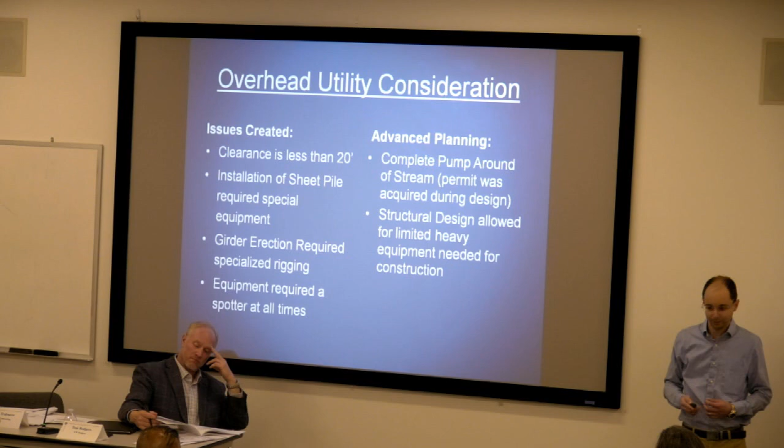Virginia, what's Virginia law? Anybody know? How close can I put my piece of equipment to a piece of pipe? Two feet. So what that means is, technically speaking, the last foot of that trench, I'm hand digging.

It's a pretty expensive pipe for what amounts to be a whole stick of pipe. 42-inch gas, you got to find it first—that's normal, that's no big deal. But then you're hand digging 8 foot long for a foot deep in what I'm sure is not the most conducive material. It's not sand, it's rocky dirt. Pretty tough hand digging.

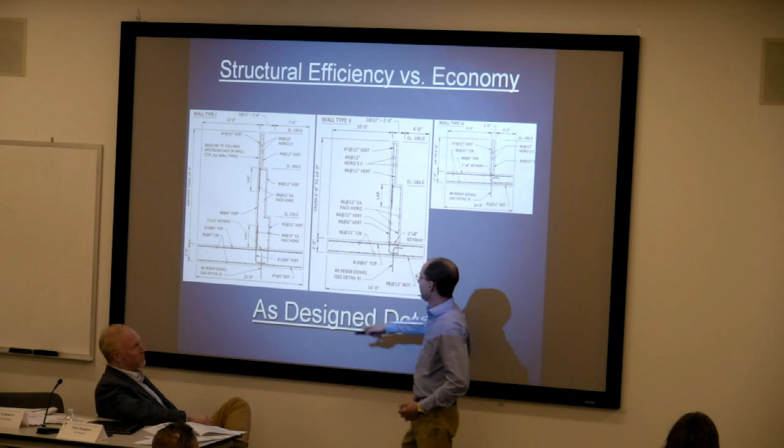So, private job, the designer did a great job, showed 3 different wall types, detailed them well. And it would have been great for anybody that wanted a handset. Handset forms, maximum heights between the steps were about 7 feet. So it would have been very conducive to somebody that wanted to go in here and handset to the first cold joint, pour it. Handset to the second one, pour it again. And just work his way up the wall.

One of the things the designer didn't consider is this bar here. It needed to be down, anchored in. It had to have a lap of some sort down into that lower segment. But there's really no way to support that bar. It's kind of just dangling off of one tied connection. So if you poured it that way, one lift at a time, you got a bar that's embedded, but while you're pouring that wet concrete, that bar dangles back and forth as you vibrate the concrete and move it. So you have a hard time holding it without a template.

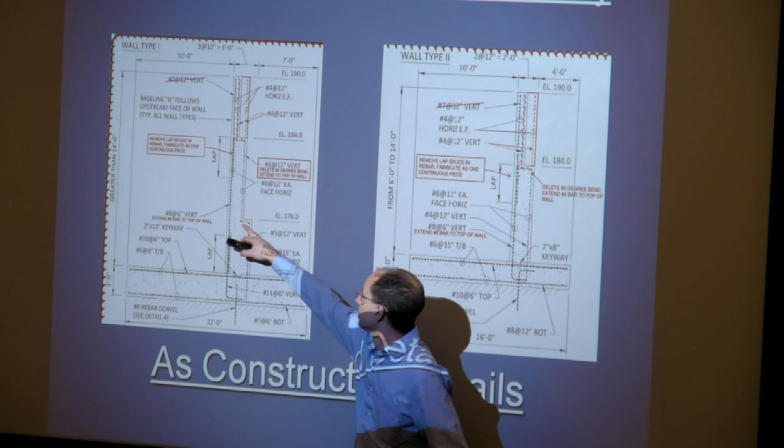What was changed, through an RFI process after we were awarded the job: the 3-foot wall at the bottom was poured that way, establishing the cold joint. This rebar was stuck down in here, and there were some chairs off the backside to hold it. But it was cheaper and more economical to use a heavy crane, a heavy set form system, and pour a 14-foot tall wall. It was 2 foot thick.

So all that rebar got adjusted, that single face rebar on both sides. It didn't have that step and that jog. It didn't have extra cold joints now. At the end of the day, they got a better product: less cold joints to affect the chlorides, rot the rebar away over time. And they got a 2 foot thick wall where they structurally didn't need one.

But if the designer wasn't willing to work with us, wanted to take offense or whatever to us questioning the design, and not have that partnership type atmosphere, the owner doesn't get the benefits of the better design, the better opportunity. And quite frankly, we spend a lot more money trying to build the wall in labor that nobody recoups at the end of the day.

So, just the things to consider as you're designing. We see it a lot in caps, pier caps for bridges. You can create all these fun shapes at the bottom of a pier cap to economize the concrete. Well, that economy of concrete—the concrete is cheap. You economize the loading that gets into the column, sure, but the concrete is the cheapest part. The labor to build that form system just doubles, triples, quadruples. So consider the effort it takes you to detail it in CAD, all that extra line work you have to do. Think about somebody having to do that in reverse out of forms, lumber, wood, metal forms, whatever it might be. All that's got to be created in reverse.

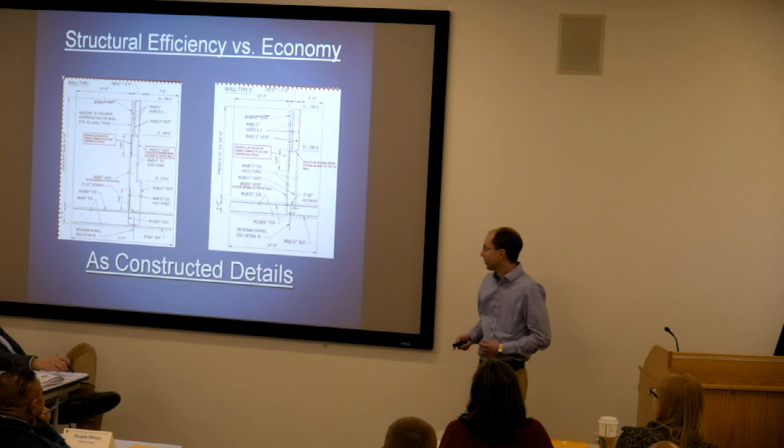The designer assumed less concrete would equal lower cost, and the steps would increase efficiency. On our side, fewer man hours meant lower cost, and concrete was cheap, so getting another load out was no big deal. More concrete is actually a savings in efficiency: fewer cold joints, better durability, and a more continuous rebar reduces both material and installation cost. They got a continuous piece of rebar all over the top.

Do you have any questions, comments, or things you want to discuss?

How are you allowed to build over those massive gas lines without serious input or restrictions from the gas company? On that job, the gas facility is inside VDOT right-of-way, so they're a guest on the right-of-way. They had to extend their casings and do some front-end work. The entire time we're working over those facilities, we have a dedicated babysitter who watches everything we do and wants to know everywhere we'll be. We cross it with a storm run above it, and we also have a jack and bore for the water line that goes under it, so we open up holes and he watches us cross his line.